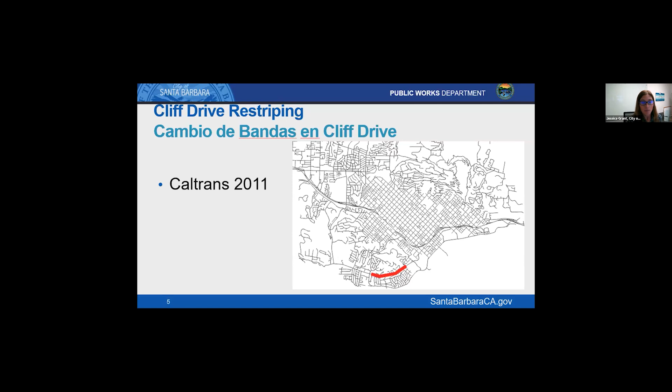And at the time, a lot of the questions were, well, why didn't Caltrans do the entire section, the 3.1 mile stretch of Cliff Drive between Arroyo and then all the way up past City College to Castillo and Montecito?

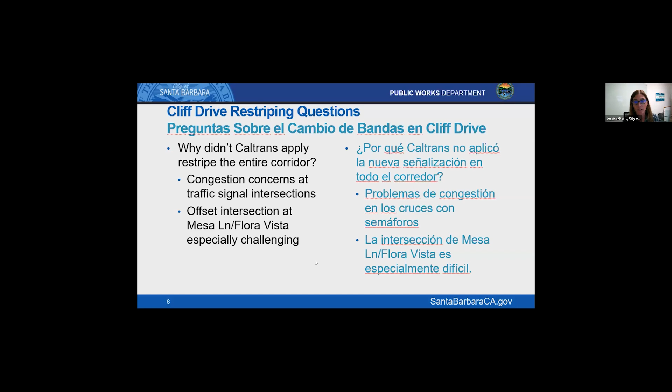And the question at the time, and what Caltrans was dealing with, was there were still congestion concerns at traffic signal intersections. And then, of course, once you proceeded north of the Cliff Drive and Meigs intersection, there's more complicated intersections - the main one being Mesa Lane Flora Vista was especially challenging.

And so other questions that we received at that time was when Caltrans did do the road striping improvements, why wasn't there other improvements done at that time, such as crosswalks or curb extensions?

And a lot of it was because it was costly, but it was also that what needed to be done to the street required more than just painted lines on the street. Again, Cliff Drive was designed as a highway, and so it was designed to be a faster street, and just painting lines wouldn't necessarily remove the makeup of Cliff Drive as it exists today.

During that outreach time, and with Caltrans and then later with the city, what we've heard for crossings across Cliff Drive was Santa Cruz, Weldon, and Oceano, the vicinity of Santa Barbara City College, Oliver, and of course, anywhere where there was a bus stop location as well.

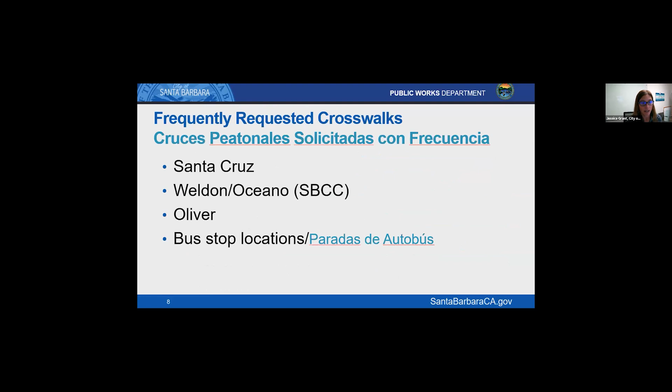And so fast forward to 2013, that's when our city council agreed to pursue with Caltrans the relinquishment process to, again, make Cliff Drive from state control to local control. That process took about a year, and it was completed in 2014.

There was a couple exceptions that Caltrans still owns, and that's the Castillo undercrossing, the Las Positas train overcrossing, and the Las Positas retaining wall - a very large wall that you typically don't see when you're driving along Las Positas because it's below the roadway.

So again, in 2014, Cliff Drive became a city street, and so that became under local control to really start to evaluate it, to sort of change it from that highway feel to then more looking like our local street network.

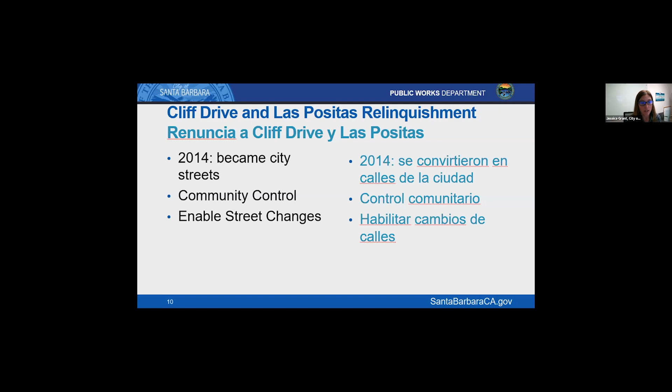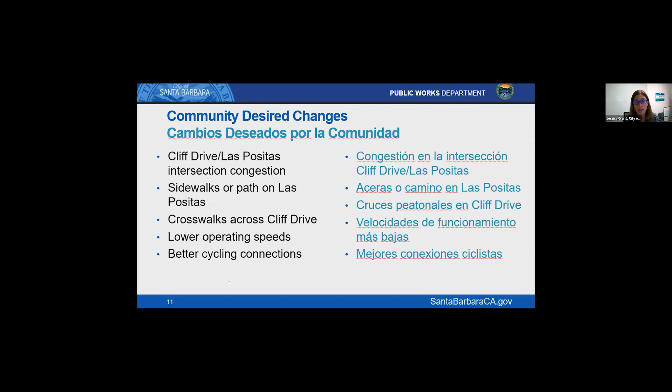And so earlier on, there was requested changes, of course, to the Cliff Drive, Las Positas intersection to address the congestion there. There was requests on Las Positas to have sidewalks or a path, crosswalks again across Cliff Drive, and to slow the roadway speeds and to have better cycling connections.

So some of the projects at that time in 2014 that were more developed was the Cliff and Las Positas roundabout that now exists today. That was finished in 2017.

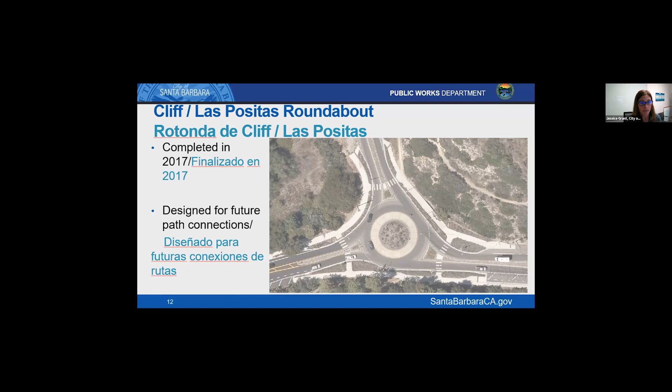And then, of course, what you've just recently seen over the past couple of years that was in construction and became complete in 2022 was the separated multi-use path along Las Positas and Modoc roads.

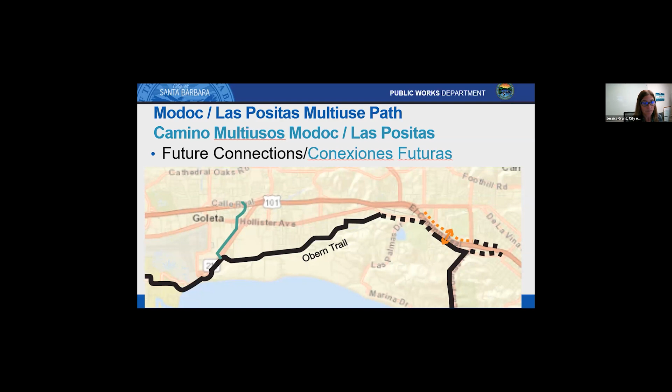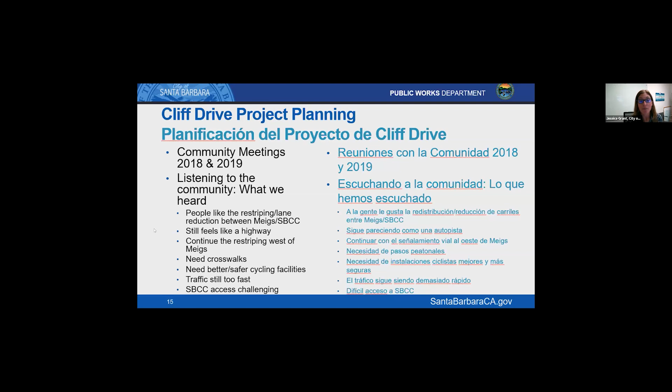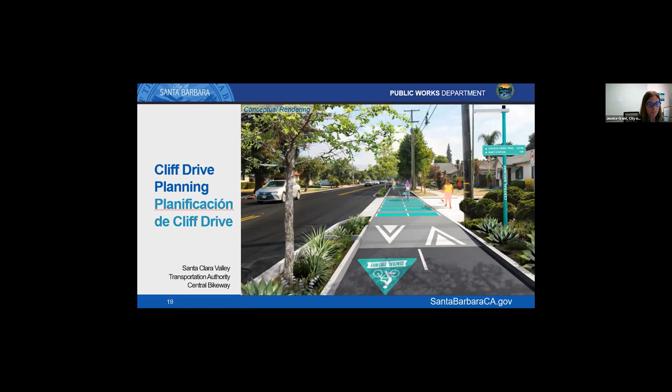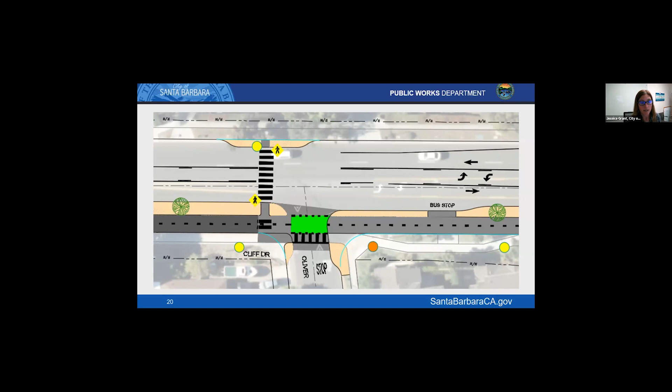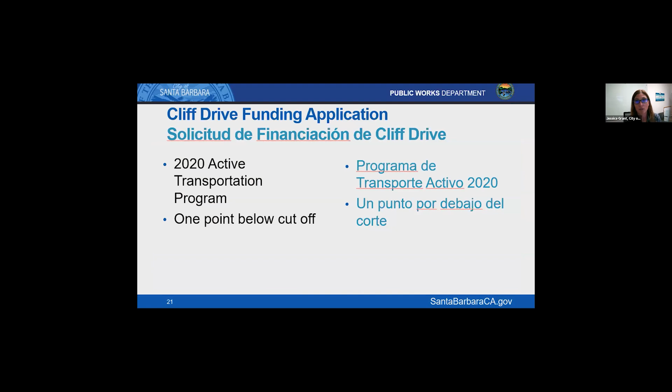We were so sad when we fell just one point short of the application, but we didn't give up because we know this has been a long time in the process for a lot of residents. We applied again two years later, in 2022.

We made some adjustments to the application. One change, though, during our outreach in 2022, upon further review, was an alignment change in the retail or service portion of Cliff Drive, flagged on each side of the Cliff Meigs intersection.

It was really hard because from a destination point, and with all the services on all four corners of this intersection, having the path only on one side created issues for getting to very important destinations.

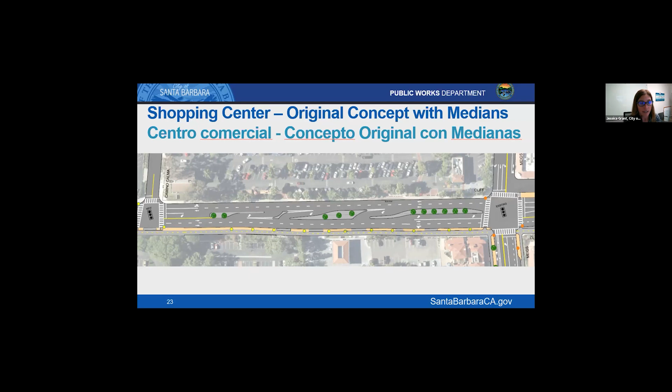So we looked at splitting the bike path just in the commercial portion of Cliff Drive to either side of the street. This is a zoomed in portion. Zooming out, the path would be separated to the west of our Cliff Drive Meigs intersection as well.

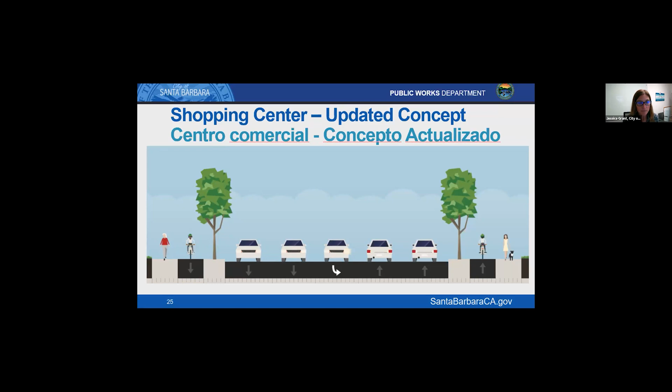This is what it would sort of look like in concept. This is just an example from Santa Clara Valley. We would have our own Santa Barbara style of infrastructure, but this would be sort of what it would look like if the Mesa Shopping Center was on our right-hand side, with a bus stop location.

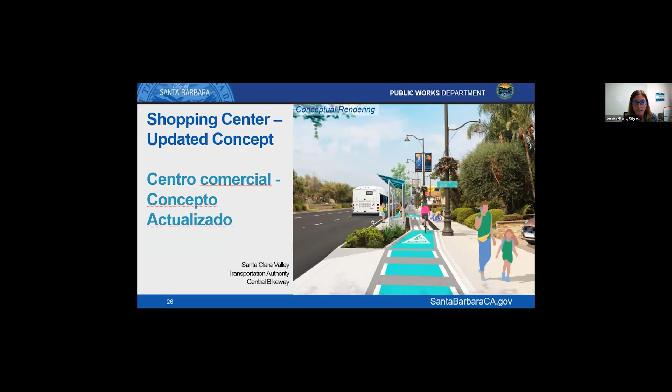Here's another way conceptually to look at it, again from a space standpoint. The design would have more of the Santa Barbara style flair to it.

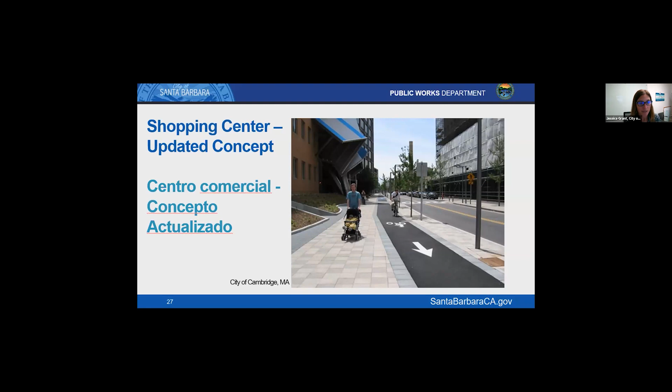So happy to report, and for those that have been following the project, we received news a little while ago that we were able to receive funding for this project. We have 33 million for the overall project costs, with the bulk of the funds coming from the Active Transportation Program.

Since receiving news that we received the grant application, not all the money comes right away—it comes in phases. The design monies came in this March, earlier this year. So some of the first orders of business, because of the size of these very large projects, which totaled about 54 million in grant funding for these three city projects, we needed to hire a new project engineer and planner, and we've done that.

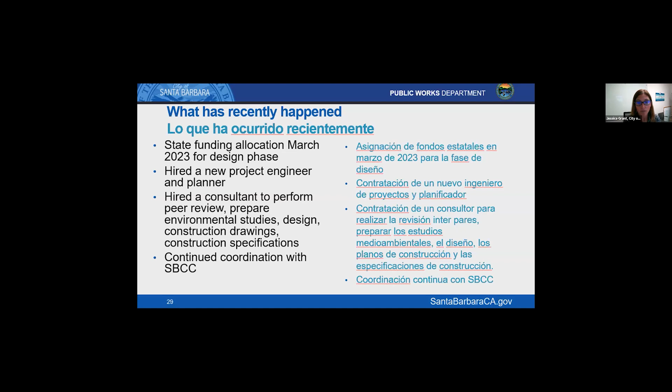We've also continued coordination with Santa Barbara City College. They're also looking at redoing some of their entries, especially in the main campus area. We need to make sure that our path, which goes through campus-adjacent areas and will be on some of the campus property, matches well with what they have envisioned for their new entrance. So in form we have the concept, but what it looks like is what we need to be working on now in the design kickoff phase.

I'll talk a little bit more about the aesthetics in just a moment. With the entry to Santa Barbara City College, we also want resident feedback, since there's going to be a big planting opportunity for trees along this corridor. We do have to separate cyclists from vehicular traffic, so it's a great opportunity on the south side of the street to plant trees. But do you leave the north side of the street barren?

We'll show a couple of photos of what we mean by that. There have also been requests from the neighborhood and some businesses to relook at the Cliff Drive Meigs frontage road—I'll show an image of that—and connecting Cliff Drive to the waterfront Beachway, the multi-use path that runs all along the waterfront. Between Cliff Drive and the Las Positas Modoc multi-use path, all of this plays into an overall 30-mile route between Ventura and up to the UCSB Goleta area. Over time, we're hoping that coast route becomes an all-age facility, and this is a critical connection within that route.

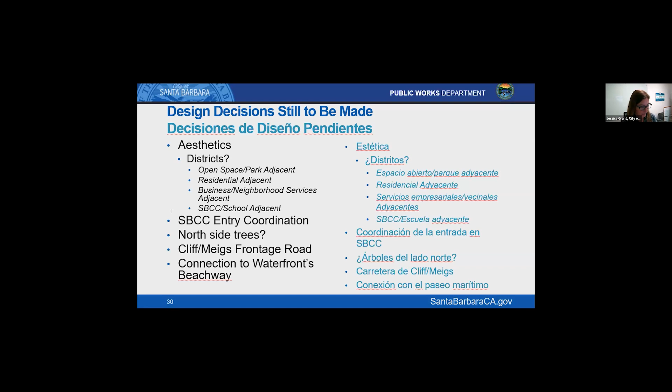So let's talk about design themes for this, and I'd love to hear your feedback tonight. We'll also have an in-person meeting in a couple of weeks, so feel free to reach out then as well. We won't be deciding on any tree plantings this evening, but if we start looking at the path going from Hendry's Beach or Arroyo Burro Beach and then climbing up the hill, what does that look like in terms of feel? We think it would probably be very similar to the Las Positas Modoc path now, because with open space adjacent, it's probably oak trees planted in the parkway—a more organic feel—since after you pass the beach, you're right adjacent to the Douglas Family Preserve and Elings Park.

But as you climb up the hill, then you're in the residential area. So what does that feel like? I think we want to make this, again, a safe route to schools, to Monroe Elementary. How do we make the route for students and families feel really comfortable and fun? Maybe we have some special stenciling for the cyclists within the roadway that the kids from the school design, maybe there's an art contest, that type of thing.

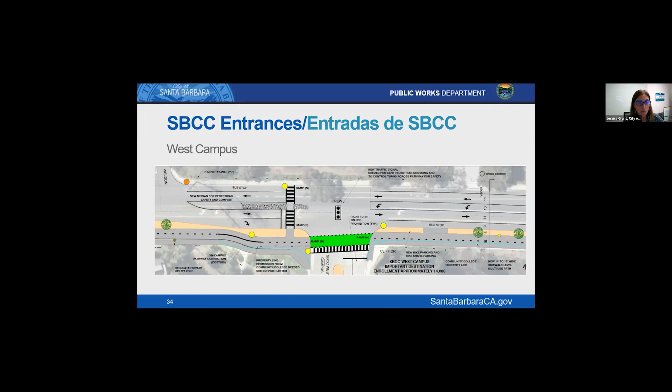Another thing we're looking at, which residents and some businesses have requested us to explore, is that currently there's a frontage road right at the intersection of Cliff and Meigs, where the Rose Cafe and Taco Bell are located. It's currently a two-way street, and we want to evaluate it more as a one-way travel lane, with a new curb extension here, to look at better circulation in this area. So that's another thing we'll be requesting feedback on as we move forward in the design phase.

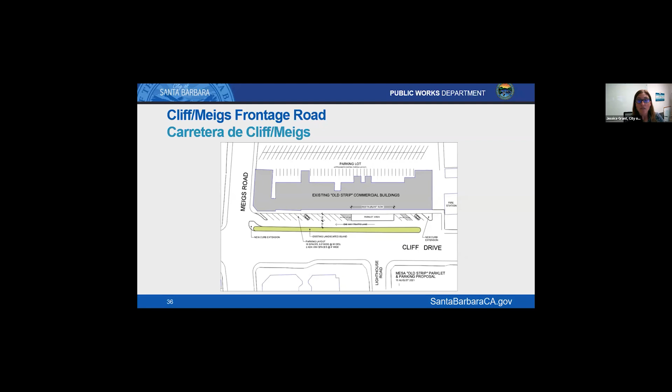And lastly, once you use Cliff Drive and want to go to the multi-use path along the waterfront, or from the waterfront to Cliff Drive to get to City College or your destination, how do we make that a strong connection? That would be along Castillo between Cabrillo and Cliff Drive. As part of the grant funding, we'll be looking at the potential for a multi-use path on this section too, working with our Parks and Rec team so we wouldn't have any major parking removal or impacts to the park property. That's another item we're exploring.

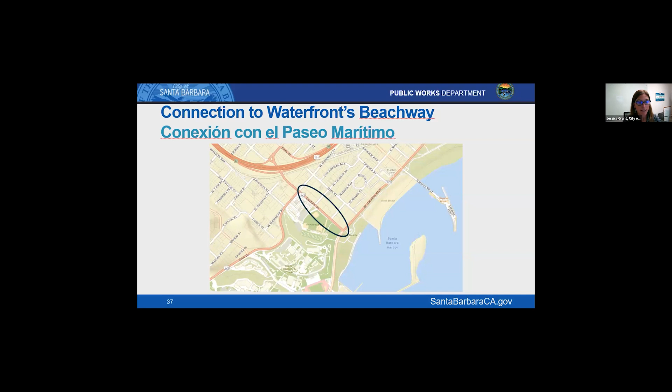Once we have more survey data available, we'll share more information. So what are we doing now in the design phase? The consultant will be surveying Cliff Drive, bringing in all the utilities under the roadway. They need the survey to make sure all the crossing improvements meet the Americans with Disabilities Act, also known as ADA. Then there are all the technical studies, like soils and geotechnical work for retaining walls that may be along the path.

We will continue to have community check-ins through this process. As I mentioned, we'll need to have some decisions on aesthetics, and we'll have a courtesy review from the city's Architectural Board of Review. We'll also be looking at the City College entrance connections and the frontage road adjacent to the Cliff and Meigs intersection.

Our construction schedule is estimated to begin in 2027. For those following the project, some of you, including us, wonder why this can't be built tomorrow - we'd all love that. We'll try to expedite the design phase as much as possible, and a lot of it depends on how quickly we can resolve the design aesthetics and other items I mentioned. Once this project goes out for public bid, we'll work with the contractor to see if there's any time savings, because we acknowledge this is a long-time community need, and we'll be working ferociously to get to the finish line.

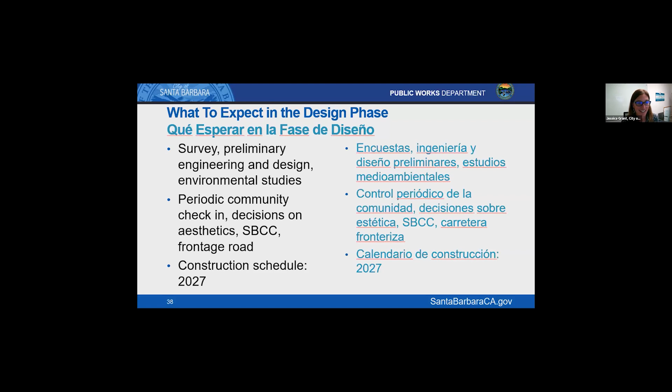On November 29th, there will be an in-person meeting. It will not be a presentation like tonight; instead, similar to past meetings, we'll lay out the entire 3.1 mile stretch along Cliff Drive so you can see the layout, then take questions and feedback. We really value resident feedback and observations, because it helps us affirm certain engineering improvements or make tweaks as we finalize design and get to construction drawings.

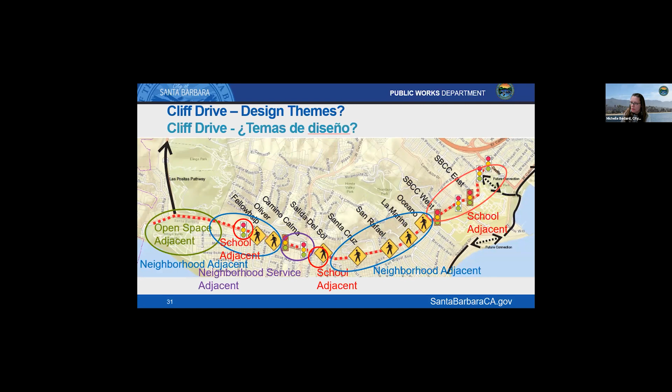Very good, thank you Jessica. Yes, we have a number of questions. The first is more of a comment regarding the location of crosswalks, from Levy. It reads: the first proposed crosswalk west of the Cliff Drive Meigs Road intersection, across from Mesa Fuel Depot, is located 400 feet from the intersection, while the first one east of the intersection, at Salida del Sol, is 750 feet away. This significant difference makes it more challenging for pedestrians to access businesses on the east side of Cliff Drive, especially given the number of residents and businesses accessed from Lighthouse Road. It also poses difficulty for those walking from the fire station and church to businesses in the Lazy Acres Plaza, and perhaps most importantly, a crosswalk nearer to Lighthouse Road would promote safe crossings to Washington Elementary School.

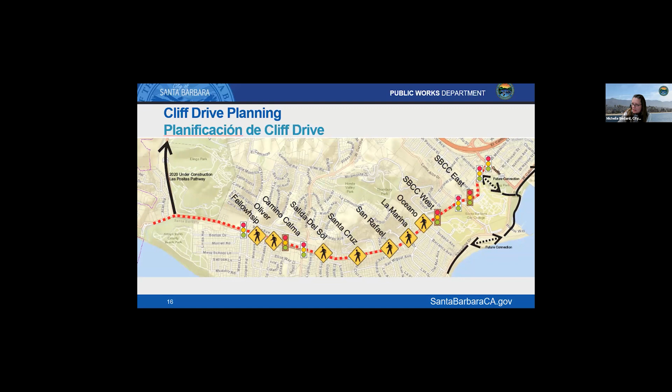Moving on, a question from Dennis Thompson specifically about the layout in front of the Cliff Drive Meigs Shopping Center, asking if there's any change to car traffic at the shopping center. He asks whether cars will be able to cross all four lanes like now, noting that's a little chaotic. So what are the changes to that intersection in front of the Meigs Cliff Drive Shopping Center?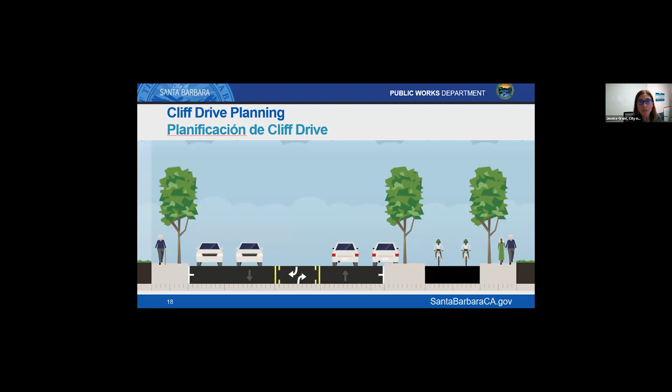Jessica, if you could open that, go back to that slide. Yeah, and some of this I might be pulling up the drawings. You want to try sheet 12, Jessica? Sheet 12, okay. Yeah, thank you. I'm going to re-switch over here. And go here. All right, Derrick, did you want to talk about it? Sorry, I was just making sure I had the right drawing up.

Did you want to talk about the ins and outs? Yeah, I can take a stab at it, and if you have anything to add. Sure. As Jessica mentioned in the presentation, the first concept we were working off of was a continuous two-way pathway for the length of Cliff Drive. Through the business corridor as well, it would have been a two-way path along the south side of Cliff Drive.

There were some pretty significant safety concerns with a two-way path on one side of the road. There's a lot of turning movements in and out of the commercial driveways. In order to make a two-way path safe, one concern is that some drivers may not be expecting cyclists coming from that other direction. So how do we improve safety? You start limiting the amount of turning movements that can take place. That first concept with the two-way pathway along the south side included medians.

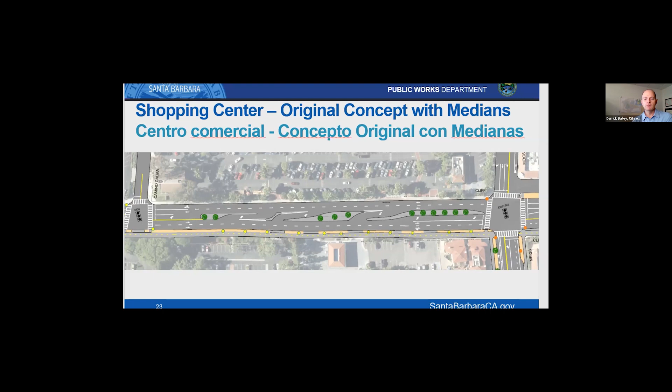It would have been a nice opportunity to potentially plant trees in the middle of the street and improve the landscaping. But we heard a lot of concerns from the business community and residents about access, potential congestion, and just being able to get to businesses. So we revisited that and pivoted, and that's where the concept of a one-way path on each side of the road came up. That way we could maintain the existing circulation, provide the bike connections, and improve safety with this configuration.

Jessica, if you can hover over the driveway on the north side of the road, the McDonald's driveway. Yep, right there—that's one of the ones that's especially problematic. That's the driveway, the first one on the north side of the road, west of Meigs, right next to McDonald's. Drivers that turn left out of that driveway to go eastbound on Cliff Drive—that's a really challenging movement, and oftentimes that left turn lane to go onto Meigs is stacked up. So we spoke with the property manager and owner for the shopping center, and agreed that converting that driveway to force exiting traffic to turn right would be a good safety improvement, given the proximity to the intersection.

It should also be easier to turn out of these driveways once there's a traffic signal at Camino Calma, because it will create some breaks in the traffic coming from the west, so there should be better gaps in the traffic as well. Overall circulation should be easier through this area once the new traffic control is in place.

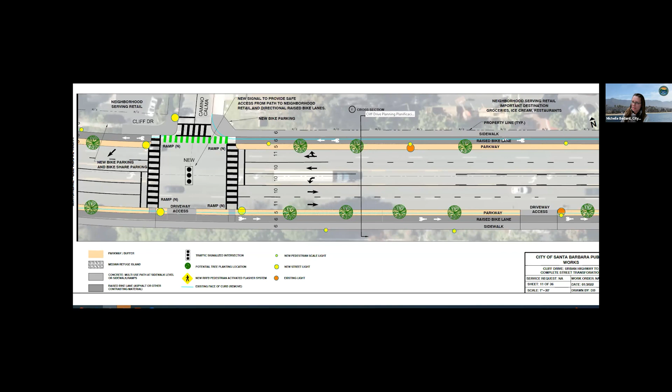Next question from Lisa Blake. She asks if you can please explain how you expect cyclists to transition between the bike path with one lane on each side in the commercial corridor to the section with both bike lanes on one side.

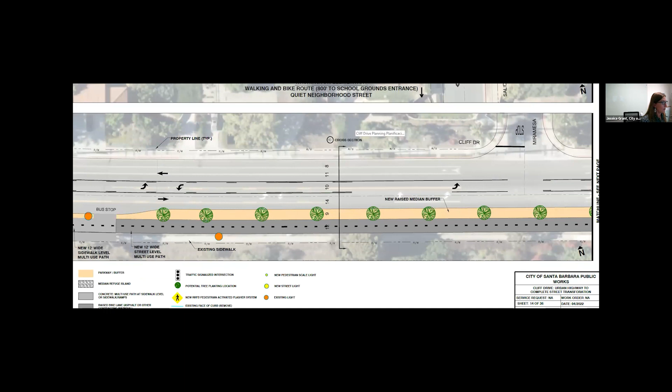Great question. Let me get to a drawing. Right about here, I would say. So this is, say you're coming from City College and you want to go to the Mesa Shopping Center. Just so hopefully everybody can see my cursor, as you're driving.

North, then you would go to the Salida del Sol Cliff Drive junction. There would be pedestrian activated beacons to get across and go along the bike path there. And if you forget to do that, you can also, at some point, hold on, it's right about there. Okay, so that is the crossing.

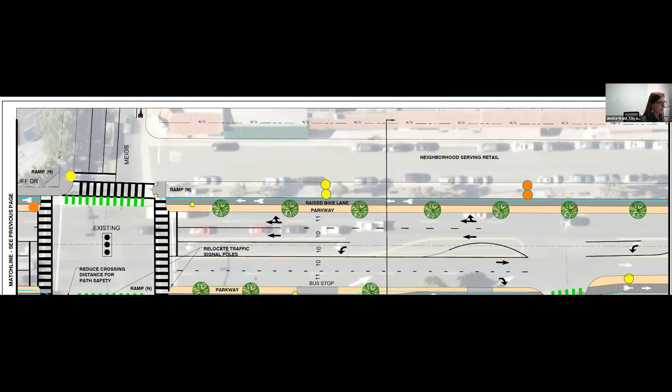Sorry about that. And then from there, so this is again in front of where Taco Bell is, for example. So you're going along, then you cross the Cliff Meigs intersection. Sorry, I'm just trying to manipulate our drawings. And then this is again in front of the Mesa Shopping Center.

And then we get to the Camino Calma intersection, and then that's when, hold on, I have one more drawing to thumb through. Oh, I went the wrong way. Did I pass it already? It looks like I passed it, Derrick. There we go.

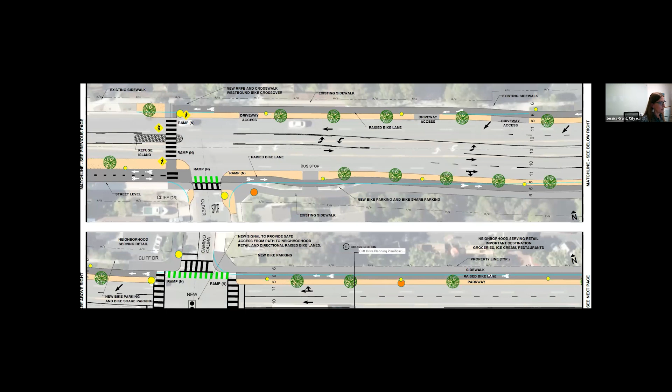From the Oliver Cliff, and then you can get back to the two-way path. It's always hard with our drawings in the webinar format, and we have a bunch of matchlines, so it can be difficult to follow. I apologize for that. That's why we also have the in-person meeting, and basically we have the entire corridor lined out, so it might be helpful to also go to the in-person meeting so you could also see it in particular sections. All these drawings I'm referring to right now are also up on the Cliff Drive Vision Zero website, where it says project plans.

Thank you, Jessica. Next question, similar. Mary Woodyard is asking to please explain why a two-way bike path is better. She says the conversation reasoning is not making sense just yet. So I'll maybe start with that one.

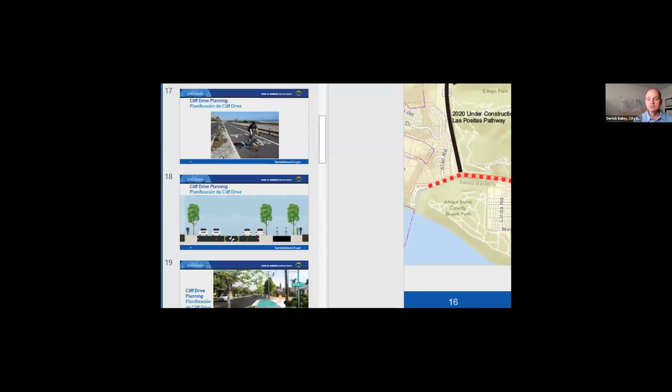Back in 2018 and 19, when we were really just starting to dig into what the community's vision for Cliff Drive would be, we showed a whole bunch of pictures of facilities that have been implemented in other communities around the country. We showed one-way paths, two-way paths, various crosswalks, all sorts of things, and we were really just trying to get a sense for what resonated with the community. Overwhelmingly at the time, this is the type of image that really spoke to people, and so that's what we've been working on since.

With the exception of the business part of the corridor, where we've done the pivot to the one-way facilities on either side of the road, this is what we've been working off of based on that overwhelming feedback we received earlier. One of the reasons somebody mentioned during one of the early meetings is just that having a two-way path increases the opportunities for interactions with other people, as opposed to one-way paths where people are on either side of the road. That was just one thing somebody mentioned, but the main driver for the two-way path is just the feedback we received in 2018 and 19, which was pretty overwhelming.

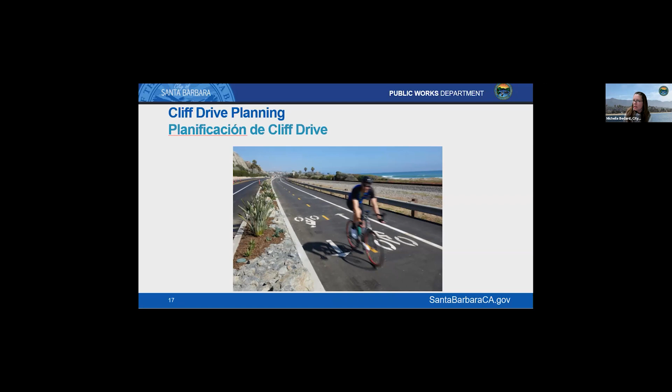Thank you, Derrick. Next question from Wally: the selection of trees should be not only on aesthetic consideration, but also for safety—how different trees react to storms and winds, branches coming down on the sidewalk and street. The question is, would the planting of trees from the fire station to San Rafael be accomplished during the burying of the utility cables?

Can we time the tree planting at the same time as some of the undergrounding of utilities? So to answer the first part for the trees, yeah, we will be working closely with the city arborist. There is an urban forest program and urban street tree recommendations as well, so we'll be working with the street tree advisory committee and Parks and Rec for the tree selection. We agree that ideally we want trees that are low maintenance, that won't have roots within the path area, and also avoid types of branches or fruit-bearing trees that would be a safety impediment.

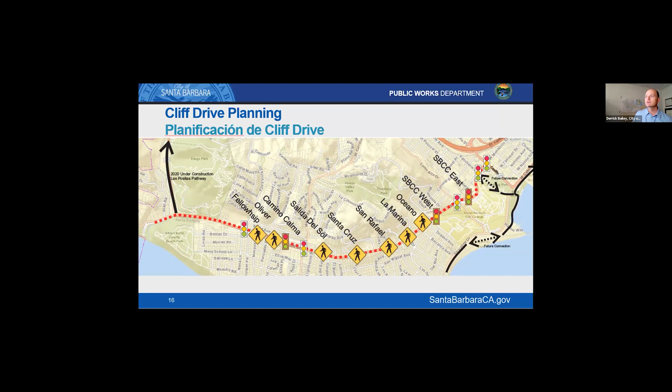Sure. And just to go back to the last question, the person was asking about pedestrian hybrid beacon, not rapid flashing beacons. Oh, sorry about that. No, that's okay.

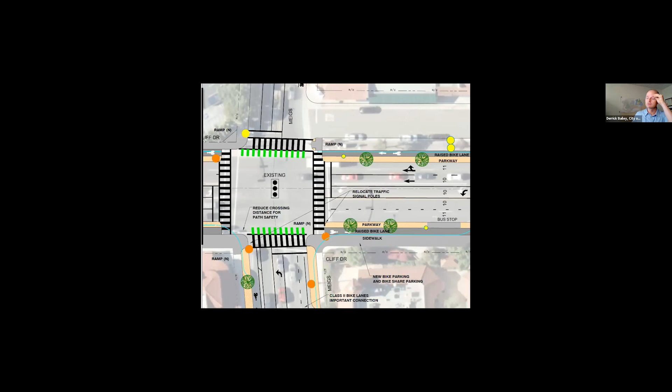Easy to mix up the two. So for residents on the meeting tonight that have never heard of a pedestrian hybrid beacon, it's kind of a cross between a traffic signal and other types of pedestrian crossings. Instead of a traffic signal head with red, yellow, green, 3 sections like that, there's 2 red lights on the top and a yellow on the bottom.

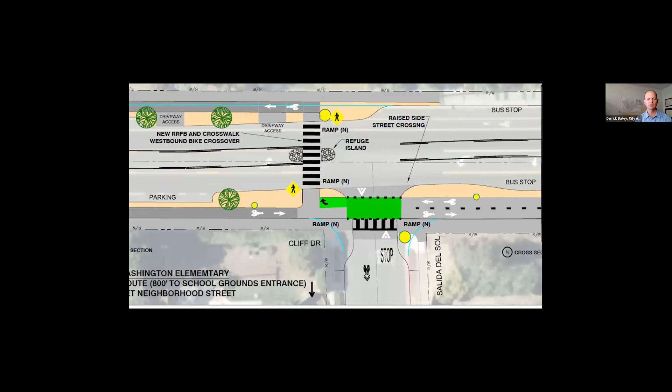And the nearest example would be in Goleta on Hollister, right near the Goleta Community Center. There is a learning curve with these things.

My city that I was at prior to Santa Barbara, back in the early 2000s, we were kind of an early adopter of pedestrian hybrid beacons. They were called a different name back then, but there was a learning curve with the public, and we found that the community started getting it more once there were multiple installations around the city.

Right now, we've only got one potential location, this one right in front of the shopping center. We need something more than a rapid flashing beacon at this location, just because of the number of lanes that are crossing. So we still have to study whether or not a half signal or a pedestrian hybrid beacon is the best fit for this location. But right now, this is the only location that we're considering for a pedestrian hybrid beacon.

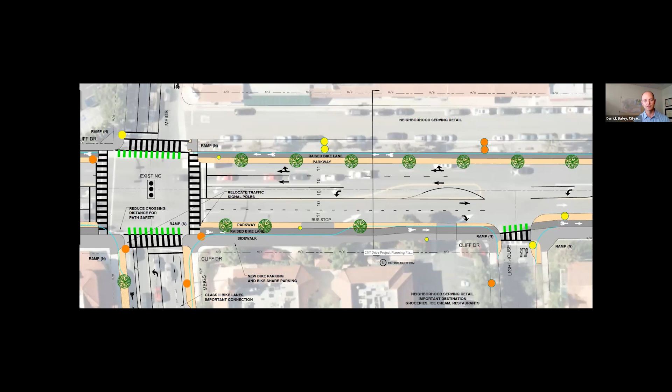If you can imagine inserting another 30 plus seconds in there for a pedestrian only phase, the cycle length and the amount of time it would take to cycle around and serve all the different movements at an intersection like this gets to be pretty significant. And the amount of traffic that would start queuing up. And even for cyclists and pedestrians, if you happen to get there at the wrong time, the amount of time you would have to wait for your scramble to happen would be pretty significant. So it's not something being considered anywhere in Santa Barbara right now.

And you can have like a scramble at certain designated times? It's either a scramble or no scramble, so that would be some of the frustration - maybe it's 5:30 a.m. or maybe 9 a.m. on a Sunday where it's really light traffic, you would still have to have that scramble on at all times. So great sometimes, but not so great at other times of the day.

All right, Michelle, next question. It says, could we please slow down cars going down from Flora Vista to Las Positas?

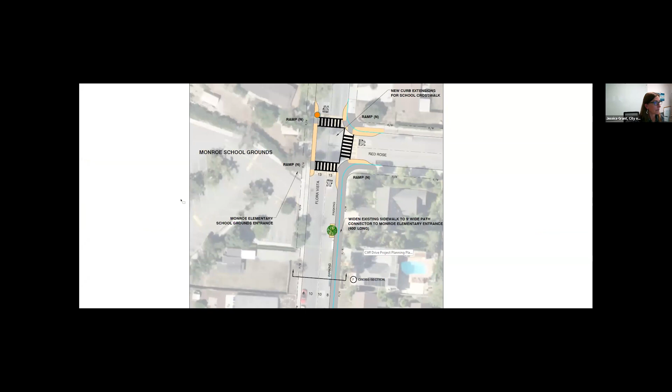Part of the project is going to be reducing the lanes just west of the Flora Vista intersection from 2 lanes in each direction to 1 lane in each direction. If you think down at the roundabout right now, there's 1 lane entering and 1 lane exiting the roundabout, so that's just going to be carried further up the hill, that cross section.

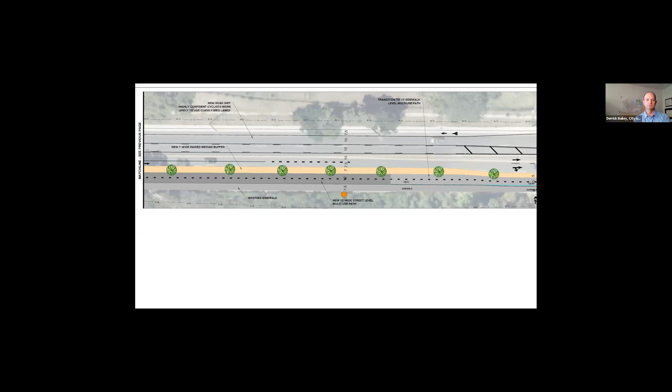We are going to be maintaining a center left turn lane just so there is extra space available in case there's ever an emergency or some type of evacuation that needs the extra roadway space. But under normal conditions, there'll just be 1 lane going downhill and 1 lane going uphill. So that should have a calming effect.

There's not much we can do there in terms of speed bumps or anything that would impede traffic, just because it is an evacuation route and emergency response route. So we do have to be mindful of how the road needs to function in emergencies.

Great, thank you, Derek. Next is a comment. It says, thank you for all of your efforts. This is a fantastic improvement over the existing state of Cliff Drive. In particular, extending this multi-use path along Castillo is a great idea to close a big gap in this protected route. So thank you for that comment.

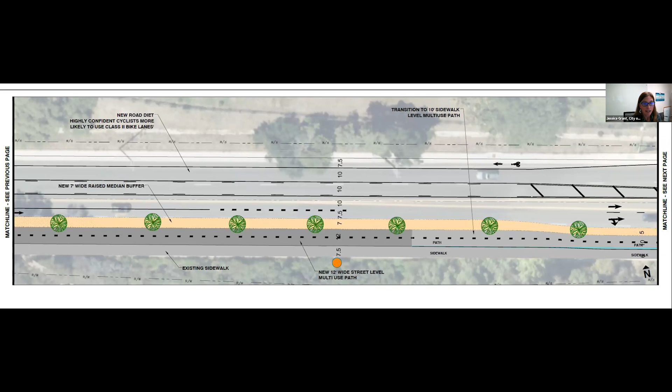Next question: when would the underground utilities commence and be completed? From my understanding, the target year for construction is 2025. I don't have an estimate on the duration, but if that person can email us at cliffdriveplan@santabarbaraca.gov, I can get back to you on the timing for that.

Next question is asking, will there be access to Elings Park South while riding a bike up Cliff Drive from the Las Positas roundabout?

I think this is probably the best drawing, Derrick, for the Elings Park South. It doesn't quite show it on the aerial, maybe when we have it printed out in the larger version, but that is something some residents in earlier workshops have mentioned as well. We'd love to hear some more feedback on tying into that.

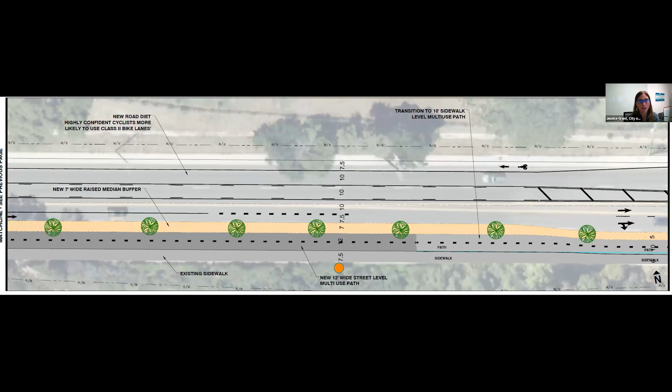Please note that when we work on these projects, a lot of times we're trying to get the mainline infrastructure in, and then over time we look to build additional connections. For example, like the Las Positas Modoc path, where there's open space adjacent, there's a bridge connection if you want to walk into the old Veronica Meadows open space area. So that's just one example of a connection, but we'd like to hear a little more feedback on that for visioning and connection. Thank you for bringing that up, and hope to hear more about that.

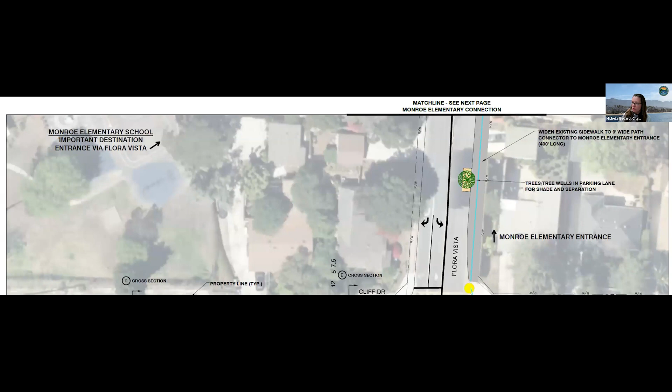Next question from David Leah: I'm concerned about biker safety at the intersections. Will there be stop signs for bikers at every intersection? These really slow riders and dissuade them from using the path. I commute using the Modoc Bikeway and have had frequent problems with drivers turning in front of me or blocking the intersection. I believe that the setup you use must prioritize the safety of bikers, who are the vulnerable party in any bike-auto collision. Thank you.

Michelle, just so I'm hearing that right, it's again about connections with the existing cross streets. Yeah, and biker safety—more specifically, whether there's going to be stop signs for bicyclists at each intersection. I see. So right now, and correct me if I'm wrong, Derrick, we would have stop signs for the cyclists at each of the intersections.

I know in some states they have sort of the yield signage for that.

The other part we have, and I might get to the other graphic as well, is the concept of raised crossings at the cross streets, again to promote better visibility for pedestrians and cyclists crossing at the intersections. And then we would have lighting as well. So for vehicles turning onto the cross streets, because they're going into a raised area, it's sort of like a speed table that you cannot drive at full speed. So vehicles will be coming across at those intersections at slower speeds at the non-signalized intersections.

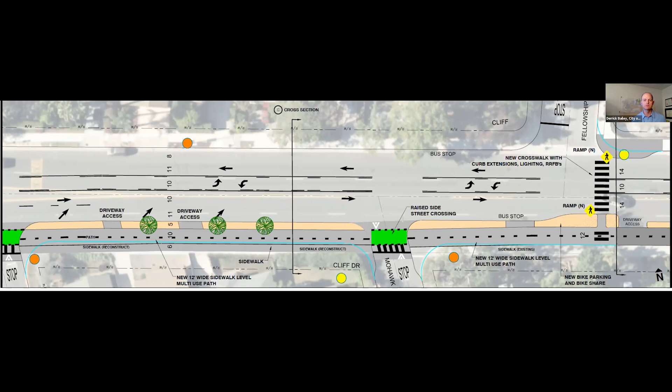Anything else to add, Derrick? Yeah, one of the things we've already been talking about with the engineering consultant team now on board is whether there's a way to provide a little more buffer between the traveled way and the bike path, so there's more space for a vehicle to queue between the path and the traveled way on Cliff Drive, so it's not blocked. That's something we're studying right now too. We haven't landed for sure yet whether or not the path will have to have stop signs. It's our preference that it doesn't, to keep it as free flowing and efficient as possible, but we will need to make it safe. So I think we're not 100% there yet.

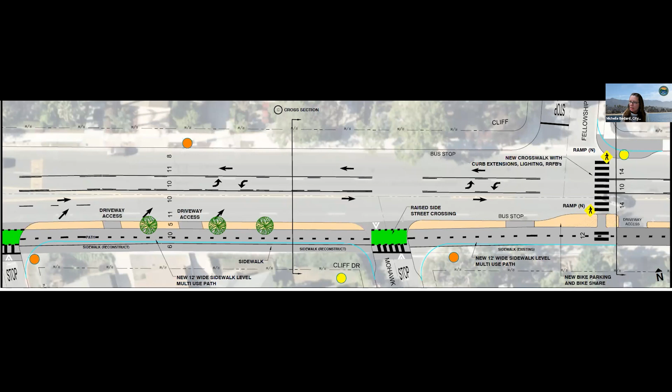Okay, great. The next one is more of a comment. It says changing the strip mall parking at the frontage road to a one-way exiting westbound to Meigs will be extremely difficult to turn left back down to Cliff. Better to direct traffic to travel east through the parking lot toward the fire station and exit to Cliff.

So Michelle, was that out of the Mesa Shopping Center or the frontage road? Oh, like the frontage road, Taco Bell side. So they're suggesting maybe changing the flow of traffic, entering at the Taco Bell and exiting out at Cliff towards the fire station.

I see. Derrick, do you want to comment for feedback on some of those, or initial meetings you may have heard from businesses and residents, as opposed to which way you would do a one-way on the frontage road area? Yeah, we appreciate the input. I don't think we've been able to determine which is the best direction yet. There's definitely some turning movement challenges where the frontage road bumps into Meigs. So if you made it one way going eastbound, like towards the fire station, getting in there from westbound Cliff Drive, like making a U-turn, if you're on westbound Cliff Drive and you wanted to get in there to turn right around and get into that frontage road, would be really challenging. But on the flip side, as the person who made the comment noted, there are challenging turning movements no matter which way you do it if you created a one way. So that's the type of feedback we'll need from the community as we explore this further.

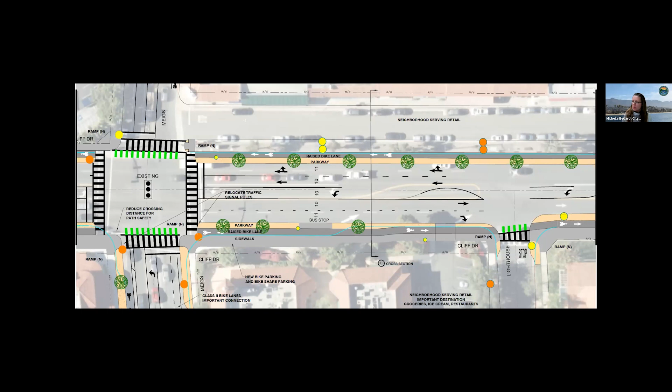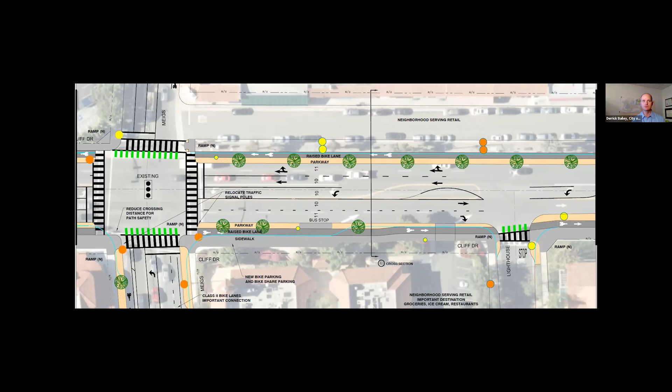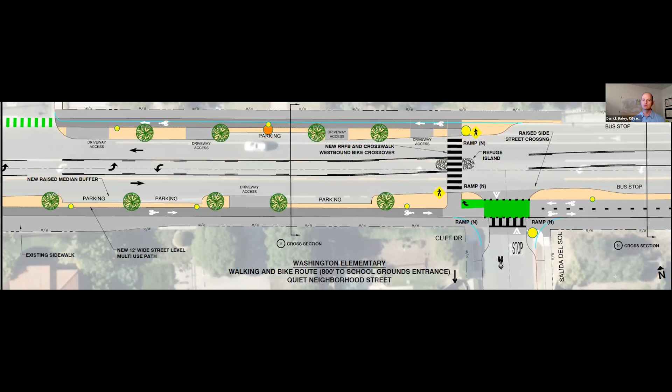Most of the crosswalks along Cliff Drive, like the one Michelle's showing in the image, are going to be about 38 to 40 feet, so a little narrower than the Meigs/Elise crosswalk. That's because there won't be bike lanes like there are on Meigs; the bike lanes will actually be behind the landscaping. We've had really good success with that. The one in front of the shopping center is a wider crossing with more lanes, so that's a location where rapid flashing beacons wouldn't be the right solution. That's why we're looking at either a half signal or a pedestrian hybrid beacon.

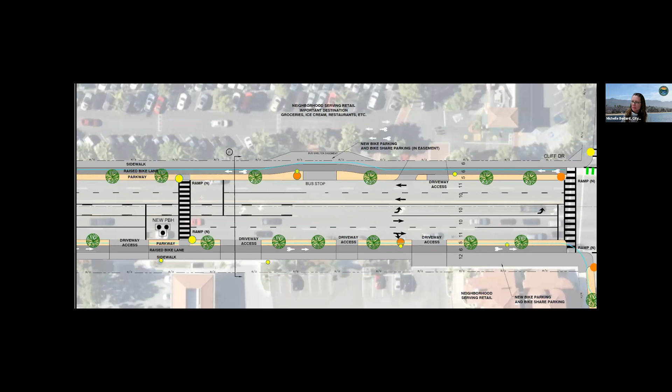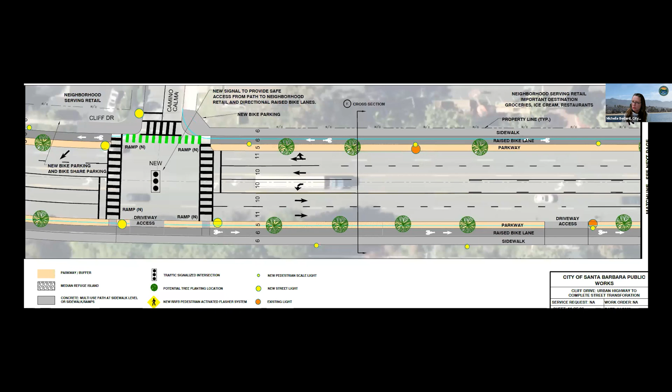Thank you, Derrick. Next question: how will the signage at the proposed new traffic light at Camino Calma be labeled? For example, no U-turn, left on arrow only, etc. Comment says the driveway at the Via Mesa complex already has drivers using it to turn around. It is not big enough for a U-turn, so drivers must come into our parking lot and turn around. That's something that comes further on as we get into more detailed design.

Next comment says, as I recall, the one-lane bike path on each side also impacted more parking spots, requiring removal. Yes, that's accurate.

Next question: planting additional trees on the north side of Cliff sounds good. Will there be an opportunity to continue undergrounding the utilities and removing the telegraph poles along the same stretch from Meigs to SBCC West entry? For the first question about the trees, that was just a comment. But then the question is whether there will be an opportunity to continue the undergrounding and pole removal along that stretch.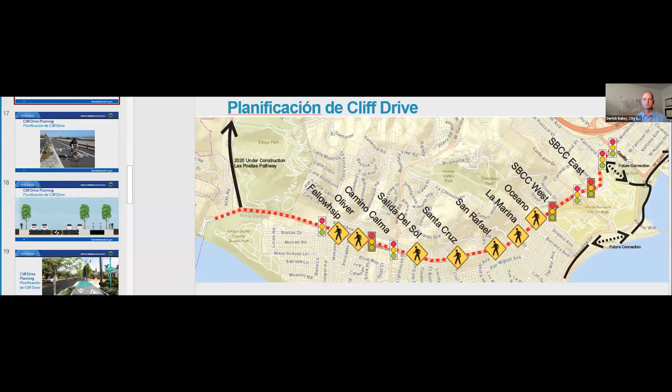Jessica, can you talk about the limits of the existing undergrounding project? Yes, the limits of the existing undergrounding project would be Salida del Sol to San Rafael. That's approximately where the utilities go underground right now, near the church and the fire station, and it'll extend further east. As far as extending that further, utility undergrounding is really expensive. There used to be a state program where money was accumulated for undergrounding projects, but that program has been eliminated, so there's no longer funding being accumulated for that. This is likely going to be the last one.

Just so those on the call can see it visually, that's Salida del Sol to approximately San Rafael, right in this section here. Thank you, Jessica and Derrick.

Next item: the distances between crosswalks at Salida del Sol, Santa Cruz, and San Rafael are greater than any others east of Meigs. Currently, the curve in Cliff Drive at Miramonte is a point where traffic is typically considerably over the speed limit. Please be certain that the crosswalk signals are at least as close to each other as shown, if not closer. Thank you. Just a comment there.

While that comment came up, one of the things we looked at when exploring crosswalk placement was a couple things. Bus stops is a big one — when transit users get on the bus in the morning on one side of the road, they typically come back in the afternoon on the other side. So how do they access transit stops on both sides safely? That was important to address with this project. We also considered the major entry points to the neighborhood and major connections. The crosswalk locations shown are generally where those major entry points are. That's how those came to be, but if there's a desire for something else, or we're missing something, this is the time to bring it up.

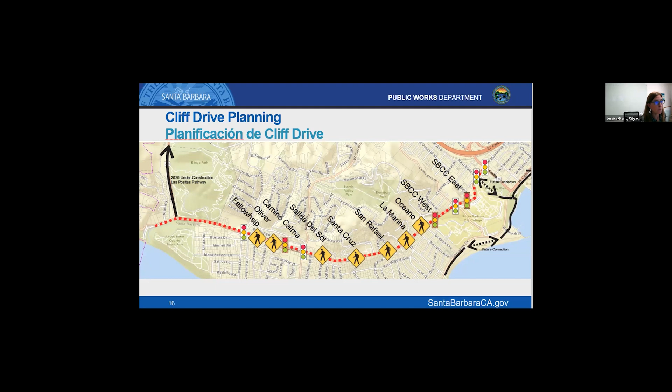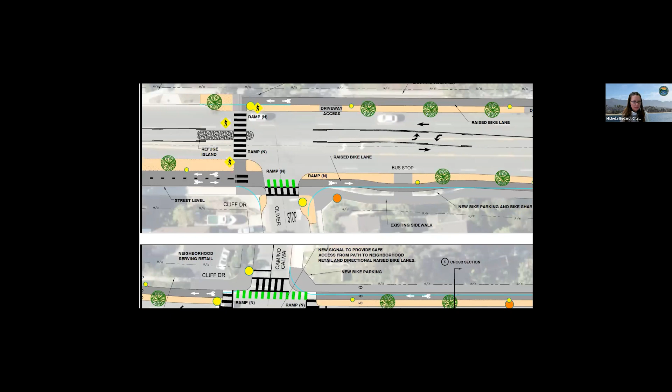Great, thank you. Next question: has there been any thought to changes in traffic patterns along Camino Calma, and what steps are considered for traffic management? Say that one more time — I'm just going to bring up Camino Calma. The question is whether there's been thought to changes in traffic patterns along Camino Calma and what steps are considered for traffic management. This project is only considering traffic control at the intersection with Cliff Drive, which will be the new traffic signal. If by traffic management you mean speed control, the city doesn't have a traffic calming program right now, so it's not something we're able to study and implement at this time.

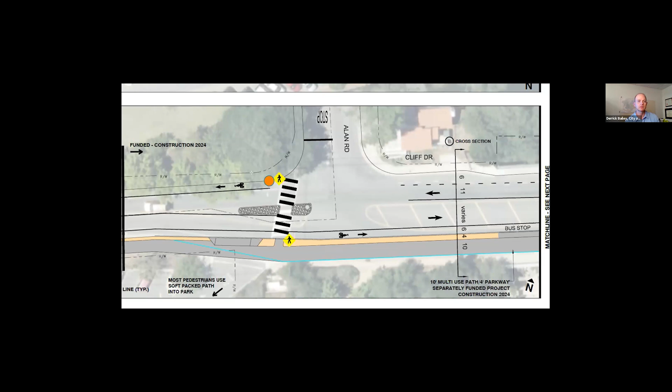Derrick, if you could chime in on the timing for installation on this one. I forget the exact year, I know it's coming up soon - it's been designed and implementation's coming soon. If you could remind me if it's 2024 or 2025. 2024 - so we're trying to get this project out to bid by the end of the year. It's going to be packaged with some other crosswalk improvements, so it'll be constructed sometime in 2024.

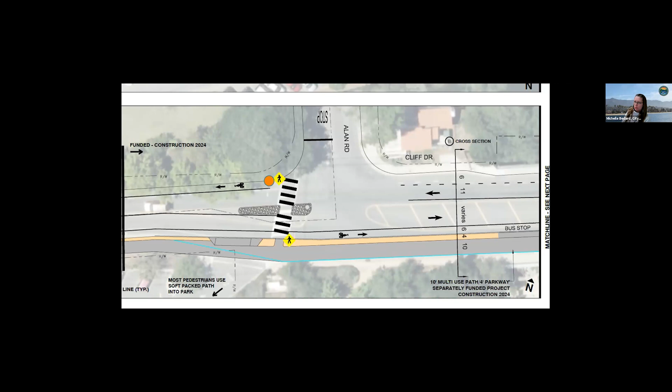Can some form of advanced bicyclist-activated sensors be considered to trigger the rectangular rapid flashing beacons as they approach the retail center crossings, for convenience, to mitigate having to always stop at the crosswalks to activate and wait for motorists to stop? Ideally, bicyclists should be able to ride through the crossing rather than dismounting and walking bikes, but we realize there is a balance.

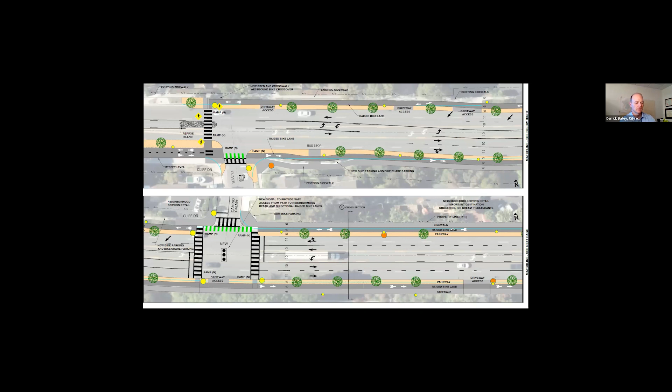Good question. Having that type of setup, where there's something more automated that senses cyclists and triggers the beacons, really requires the sensors to be able to distinguish the path of travel cyclists are taking. If they're on the path and just happen to be passing by the crosswalk and continuing on their way, the sensor would need to distinguish that from somebody who actually wants to use the crosswalk. We don't have a lot of space at some of these locations, so I don't know that would be feasible, especially near the shopping center. It is quite constrained.

But one of the things we're going to be very sensitive about is making sure that when there are push buttons to use, they're very easily accessible for all modes of travel. So if we do end up with push buttons for cyclists, they'll be really convenient—somebody can ride up right next to them, lean on them, and be in a good position to continue on their way once they've activated the device.

Thank you. Next question: where the project plan shows half the path shifting to the other side of the street at Oliver, the path appears to change directions at a right angle. This would be very difficult on a bike. Is there any chance the path could be more curved here?

I think you're on the right slide there, Jessica. But this kind of gets to what Jessica was talking about a few questions ago—how to make this crossing intuitive and convenient. There is going to be a balance. We do want cyclists to slow down as they're approaching this crosswalk, and we want them to turn so they're entering the crosswalk perpendicular to the road, so they have good visibility in both directions. But it is a balance for maneuverability as well, so that's something we'll have to work on in design to strike that good balance.

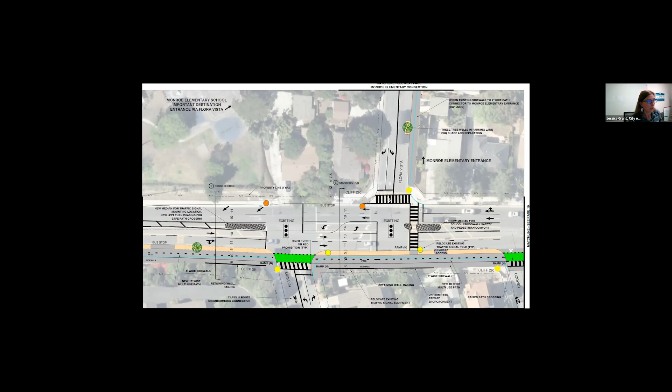This is what it would look like as you approach the parking lot area, getting up to here and crossing right at Flora Vista into the school. That's something we want feedback on from Monroe families—what's the best transition, is it right at that intersection? We're looking at the design for the best approach back into the school, so I'd love to hear your feedback on that.

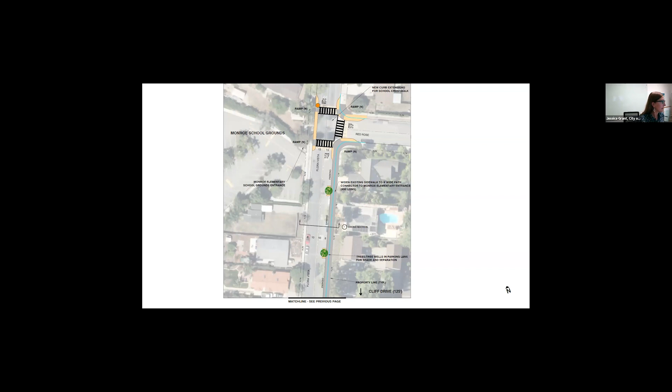Monroe will get a widened sidewalk area. As I'm scrolling through the plans, this is McKinley Elementary School, right across from Santa Barbara City College. We'll have some widened sidewalk in this area as well.

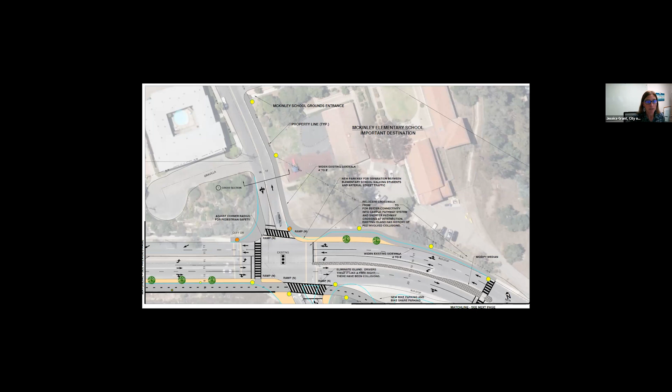McKinley is unique also because it has other entrances into the school. Some of our other active transportation program projects are putting in improvements to the west side and lower west, which also has some additional connections in the lower west neighborhood.

And then Washington Elementary—a lot of it's just having bike paths for kids to get to the elementary school. Washington School doesn't necessarily follow the district lines, so you have a little bit longer commuters for that school.

One of the entrance points is down Lighthouse Road, but we'd like to hear more from the Washington families as well on those connections.

Did I miss anything, Derek? I tried to summarize as best as feasible, but I think that was good. The sidewalks that'll go up to Monroe and McKinley will be widened. We're going to try to widen them as much as we can within the existing right of way and maintaining circulation as well.

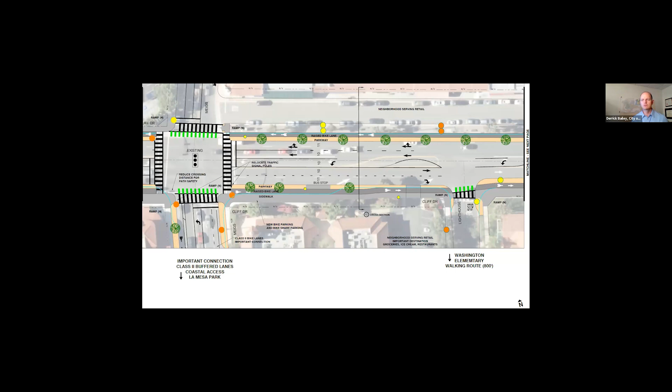I think the Monroe sidewalk should go from 5 feet to 9 feet, and the McKinley sidewalk will go from 4 feet to 8 feet wide. So it should be much more comfortable.

Next comment was just following up on the Camino Calma intersection question. It says, FYI, Camino Calma is only about 50 yards long.

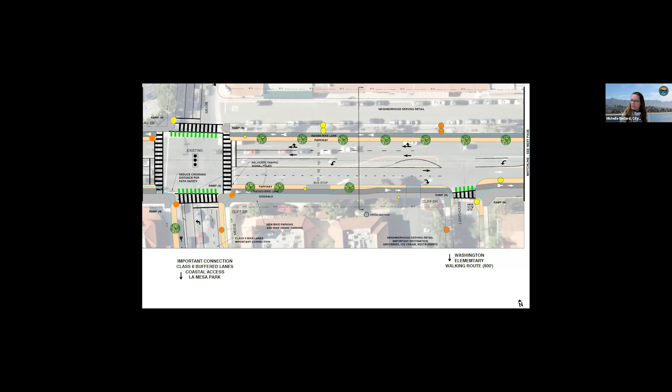The next and final comment says: FYI, roundabouts are not pedestrian friendly, and there are many pedestrians at Santa Barbara City College crossings. So again, this is following up from the prior question about potentially a traffic circle at the entrance to City College.

And that's the last question we have at this time.